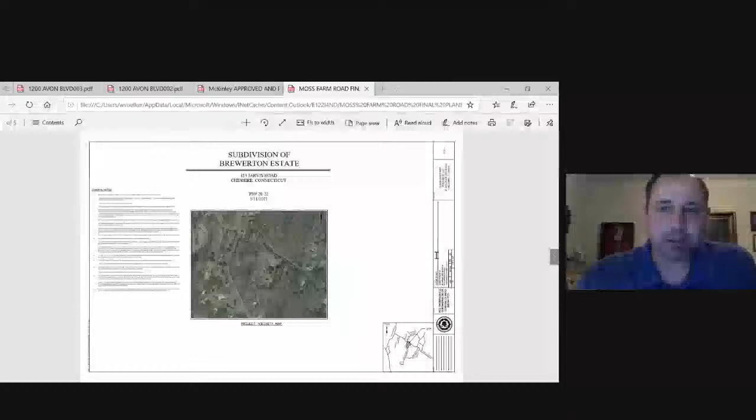If you could scroll to the next sheet from this — this one, yes, the top, too far right — yeah, right here. Okay, so you can see, it's probably hard on the screen, but in the very center of the site where you have the contour lines going up to the top of the hill, that big hill and ridge line is the most complicated part of the site.

So in order to develop this property, you have to address the large hill in the middle there. We looked at several different configurations of lots.

Before I go into that, over there on the north, the left side of the page, there's an outlot. That is actually a septic system in favor of what used to be the Curtis home, which is approximately 1,000 feet along Jarvis to the southeast.

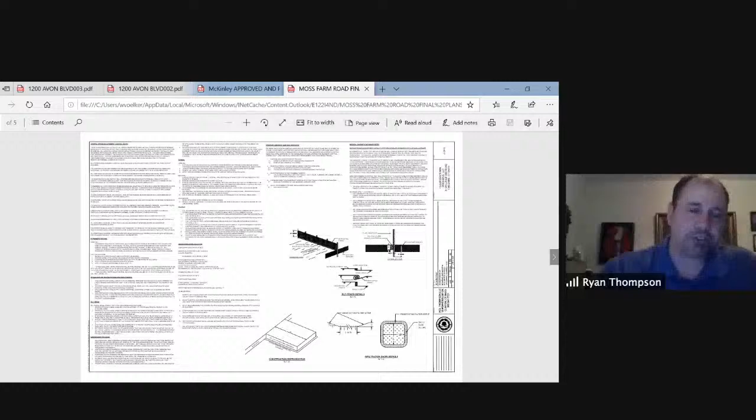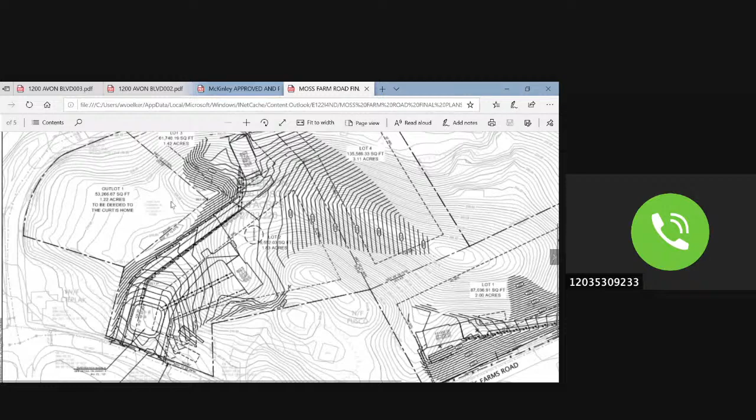Can you scroll out there? Can't do much with it, my computer won't let me do a lot with it, but the outlot is here, 1.22 acres. If you want, I can share my screen — I think I can zoom in a little easier if that's possible. Let's do it this way, Ryan. Okay, that's fine. The Commission has this by the way, they also have copies of this for themselves.

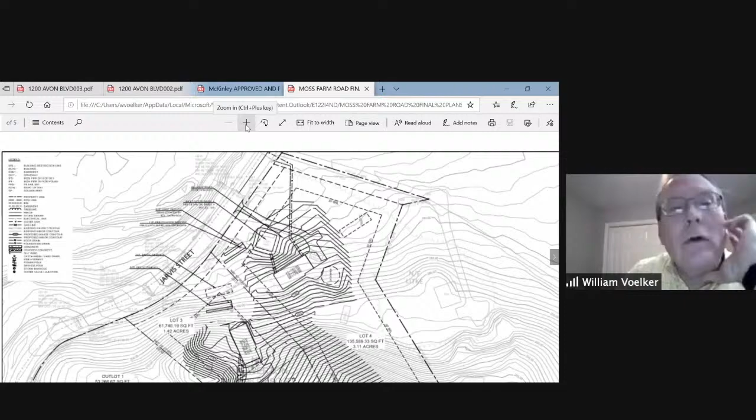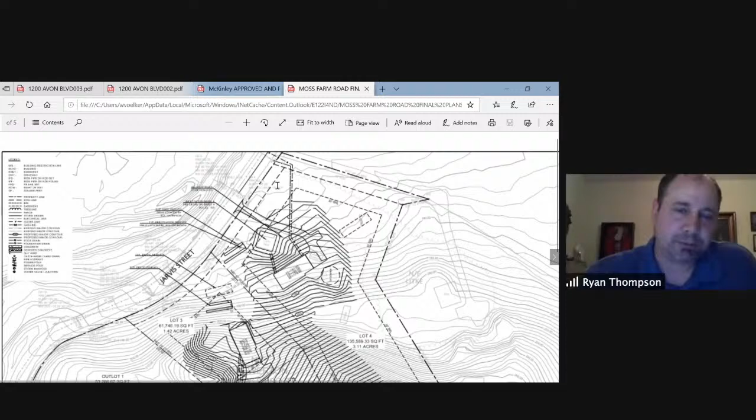Okay, well, you can see here where just a second ago, you can see the outlot. That's an easement that's been granted to the former Curtis Home School, basically up the road there on Jarvis Street. And they have a line, and you can see the easement along Jarvis Street by lots 3 and 4, right here, though that also is for their septic system line that goes to their field on outlot 1. So the intent is that's going to be deeded over to them.

It becomes their property, and it's not saddled onto a future homeowner, which I don't even think is legal. So yeah, there you can see it.

But back to the topography. Again, the big issue with this site is the fact that you have this major hill in the middle of the property that has to be dealt with. So we looked at several different configurations: a 5-lot subdivision, a potential 6-lot subdivision, and then ultimately a 4-lot subdivision like we have now.

Primarily, we settled on this 4-lot subdivision because it is the least invasive in terms of excavation. And already you have a fairly significant amount of excavation. I'm not going to sugarcoat it — it's approximately 40,000 cubic yards of export that's going to have to go on. And I'll talk about the plan to make sure that's done safely in just a second. But this is the one that has the least impact.

And you can see the very big cut up the ridge line to the middle of the hill. That's at a 4-to-1 slope — 4-foot horizontal to 1-foot rise at vertical elevation. So I tried to make it as gradual as I possibly could so that it would be easier on erosion control measures, and we wouldn't have to do a bunch of stepped benches and everything.

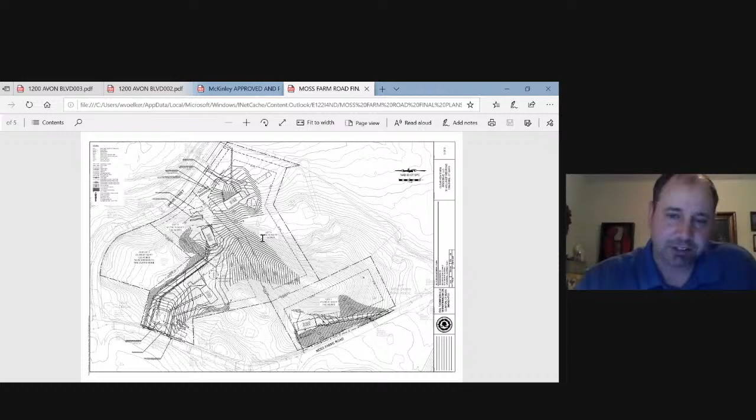So we're filling that a little bit to create a shelf to put the house, trying to balance out the elevation of the house, keeping driveway grades within reason. I do know there's some comments about the driveway grades, but the intent is that they're all 10%. So I will address that — that's the intent of the driveway grades, and to get the elevations where they need to be.

And that's why you have this long driveway on lot 1 coming out to Moss Farms Road, so that you can get a gradual enough rise up to the house pad. And then you have the same kind of thing with lots 2 and 3 — these long gradual driveways is the idea.

So I want to talk about the export and making sure that we have a safe situation with the trucks coming in and out of the property. The idea is that they would be limited to only 2 locations.

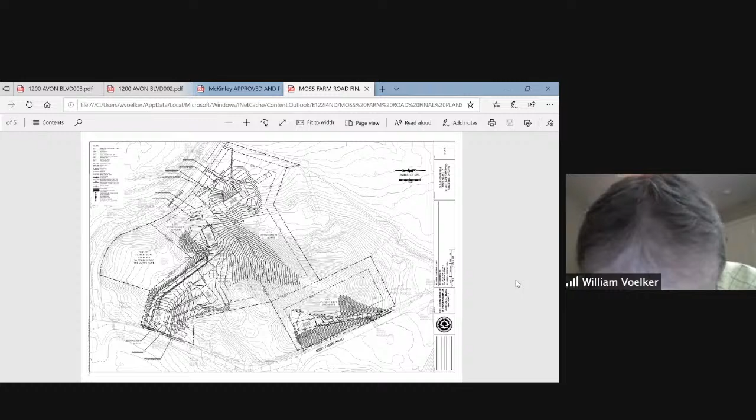And those locations would be, obviously you have to treat lot 1 as its own, so all the earthwork in and out of there - most of this is balanced as much as possible, so it should be a reduction of trucks coming in and out of there, but it's going to come to that one spot onto Moss Farms Road.

And then the rest of the site is going to be addressed in the wider area on Moss Farms Road where the driveways are going into 2 and 3, trying to avoid any access onto Jarvis Street itself, because you have steep grades in both directions and a very difficult turn there.

So all of the access in and out of the site would be from the Moss Farms Road side, one of those 2 locations. And one of the reasons why you end up having the cuts that you do is so you can almost build a little access road over to the lot 3 building pad and the lot 4 area that you're moving earthwork around on.

So that's the idea of how it all unfolded in terms of the design and the sequence of construction. I do realize there's a comment about that, which I'm going to add a sheet or 2 to clear up, making sure it's understood that's how the earthwork is going to be moving in and out of those locations, so that it's safe and manageable.

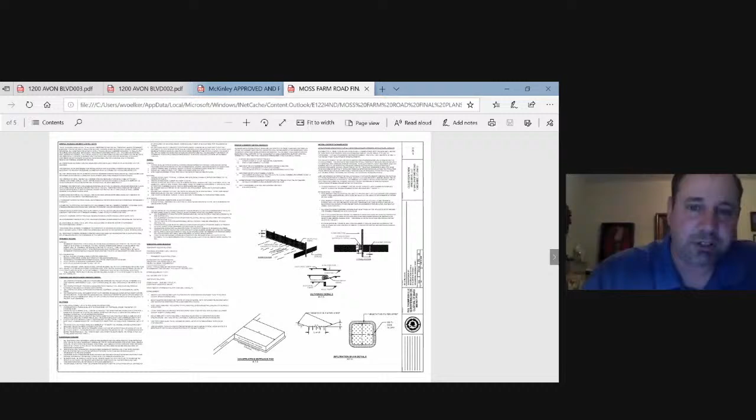And then if you go down to the last page - the fifth sheet, the one with the profiles. Let it load. That's what I have right there. Yeah, there we go, okay.

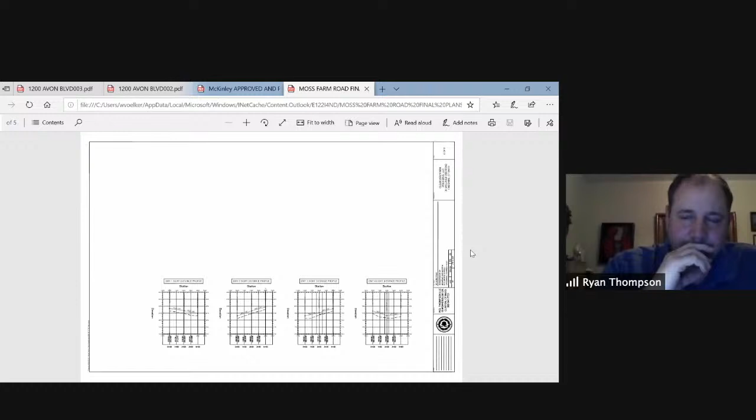So these 4 driveway site distance profiles, I specifically put them on here to show - it looks like some information is missing. That's all I have. I'll have to see why this is all you have. You better talk to the guy that sent them to me, Ryan, okay.

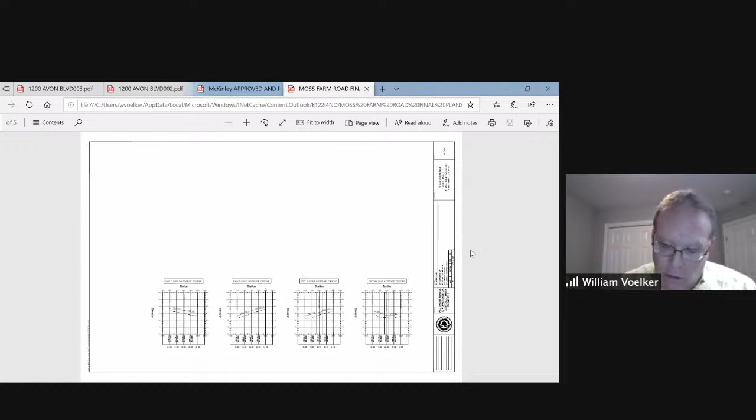I guess what got submitted physically, the information is on there, but regardless, I don't need it for what we're talking about tonight. I can just tell you about these driveway profiles - let me pull it up on my screen so I can zoom in while I'm talking.

What you have is I've done the calculation based on the grades and the stopping sight distance, and it came out to a calculated stopping sight distance requirement of 152 feet. I upped that to 200 feet in each direction for a factor of safety, so you basically have a field of view in both directions spanning 400 feet.

What these profiles are showing is that if you're sitting at the driveway where the front of your vehicle is not overhanging into the street, so you're in a safe location, you can look left and right and see a vehicle coming at 25 miles per hour, the posted speed on those roads, and you can see them 200 feet away, giving the driver adequate time to stop.

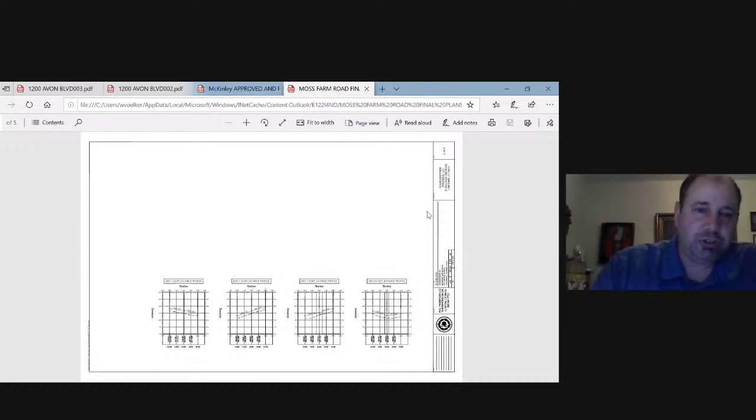However, this entire property essentially drains into 2 different areas. The southeastern part of the hill generally drains to the east of the property, into a creek on the eastern side of Jarvis, and continues on. The northern part of the property generally drains to the western side, and ultimately drains into a confluence with the drainage from the southern part. So they all end up in the same place, but through 2 different pathways—technically 3, but I've broken it down into 2 main outfalls.

So what I did was create 2 infiltration basins to treat and capture the runoff from the 2 main pathways we're addressing. One is sized to accommodate runoff from lot 1, even though runoff from lot 1 won't go through there. So you have a net reduction of runoff from the part of the property going into the infiltration basin on lot 4, to accommodate the runoff we can't capture on lot 1.

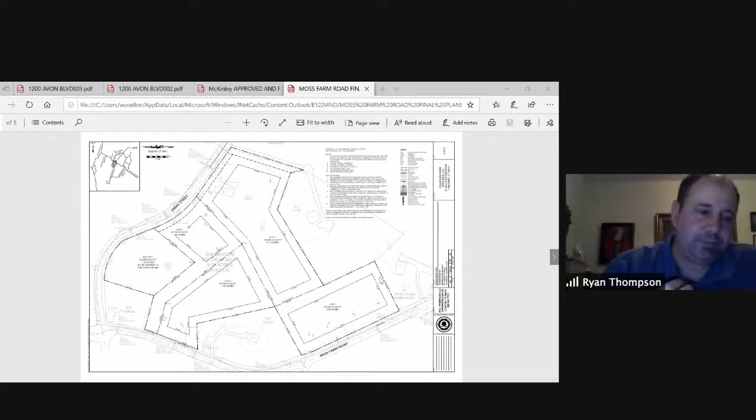Yeah, so the septic system on that portion of this existing property, before subdivision, is already built and has been there for a number of years. I don't remember exactly when it was constructed, but some years back. They had obtained an easement through this property to put a pipe, and then basically create the easement right there. And then the larger, almost square-shaped outlot is where their septic field is.

So the idea is we're just going to cut off that portion of the property that was already granted through an easement, and deed it over to the property owner that it benefits, and it becomes their property. It's not the property of the future homeowners of this subdivision, because they have nothing going to it. None of these 4 lots being created are tying into that septic system in any way, and they shouldn't have to maintain that property and those easements—and I'm not even sure the health department would allow it. So that outlot would be cut off and deeded over and become the property of, I don't think it's called the Curtis Home anymore, but it's the Curtis Home property.

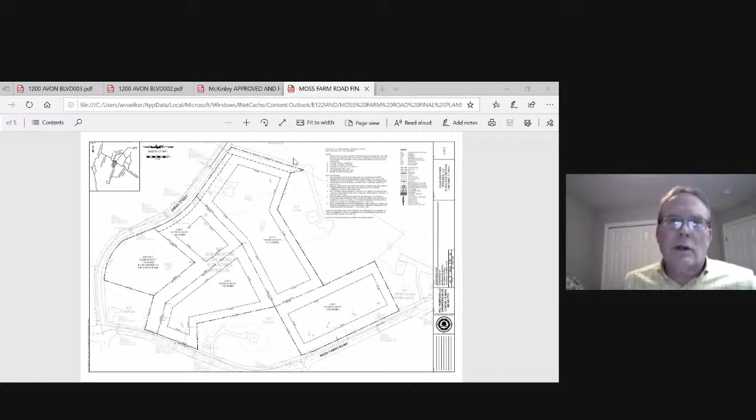Yeah, and as Ryan points out, Jeff, you couldn't even do this today—this is historic. I don't know when it was originally constructed, but Public Health Code wouldn't allow this today, ever. So, gotcha. So the Curtis home, where would that be? That would be the next property up from—no, lot 4?

Yes, they're on the next ridge line up, correct. And again, it would just be an easement going across these new lots, lots 3 and 4. Jeff, there's an easement in the front there for the location and maintenance, not by the owners of lots 3 and 4, but by the owners of the septic system currently on that property.

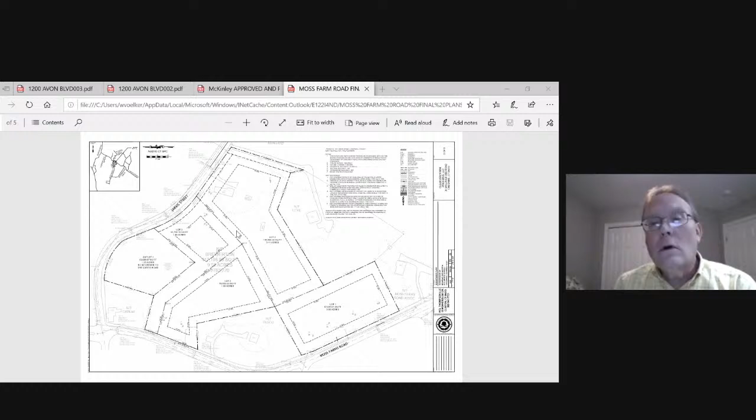Very unusual, just haven't seen that before. That's a rare one, sir. Anything like this - that's a new one for me, so thanks.

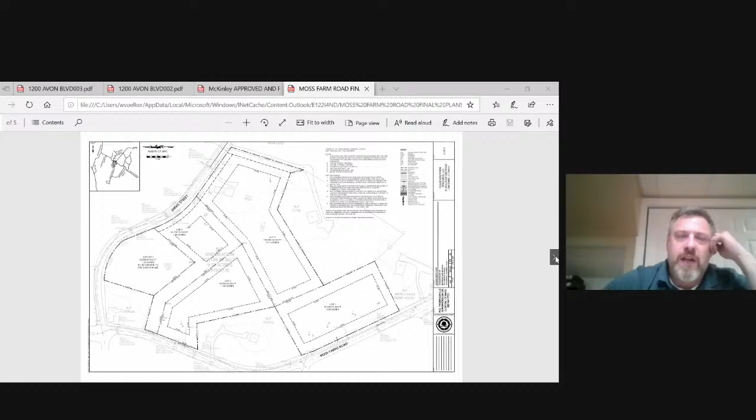Okay, I believe I saw Mr. Selmont with a hand up. Yeah, I just had a question. I see all the excavation going on, and you started to hit on the water flow. Is there any concern of the water running into the neighbor properties or neighbor lots? Any issues there that might arise?

No, so all of the drainage that's currently - let me back up. I've followed, as much as feasible, the existing natural drainage divides. So any runoff that's already coming off of the property that's not part of this development, yes, that will continue to cross neighboring properties on the fringes or outskirts of the property.

Anything that's being touched here is either being captured by the infiltration basins or is running off, in one case, into the culvert on Jarvis Street as an overflow, or the culvert on Moss Farm Road as an overflow. So it's not going into the neighboring properties - it's being captured in the infiltration basins or the existing storm sewer system that's out there.

Right, okay. I see lots 2 and 4 with the basins, and you know, I also see that there's a couple of houses on the corners of the street, but it's, you know, one thing.

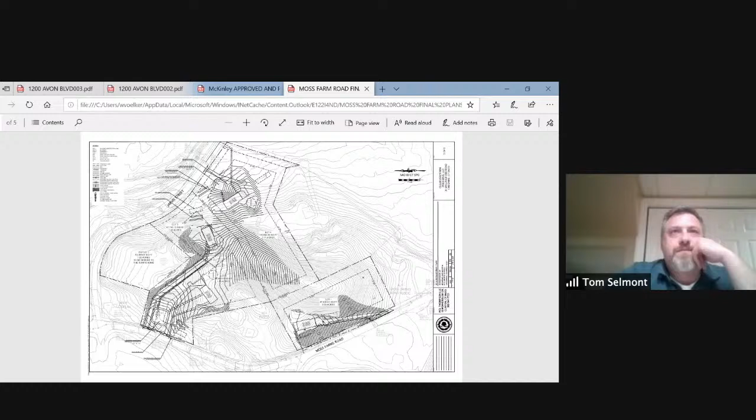Yes, so right there along lot 3, the cut on the side of the driveway - it's a cut, so anything coming from that's going to go towards the property, not towards the neighbor. Right, okay, yep, thank you. No problem.

Bill, you said there was supposed to be new maps. Yeah, we're gonna keep this hearing open, because he's got extensive comments to respond to yet, hasn't done that. So we're recommending you continue this hearing until the next meeting.

I understand it's definitely gonna be continued, but is there big changes in the maps or is it just minor things? No, there are some - he addressed some of it tonight. I don't think we're gonna see significant changes as far as layout goes. What we'll see is improvements in some of the things that he's proposing here, but generally what you see in terms of layout is what you should expect to see in 2 weeks.

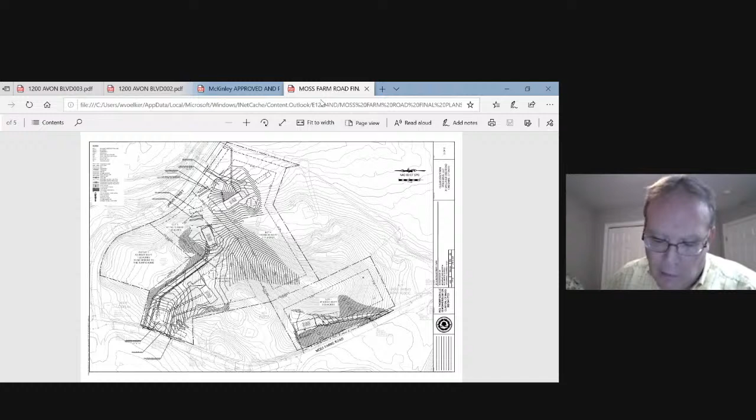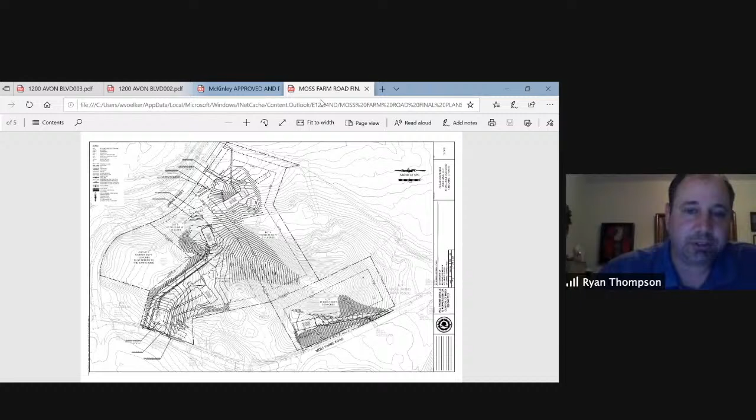Okay, yeah, I mean, to be honest, I think the biggest change I predict is going to be associated grading with widening these driveways to 15 feet per the fire department comments. And really that's only going to affect, most likely lot 1, because that grading is pretty tight up to the driveways there as it is. But it's not going to be a significant change to this.

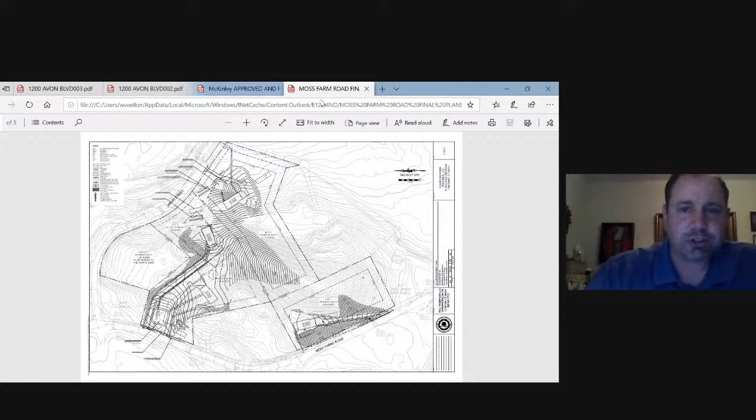I think what you're going to see is I'm going to add in a few more notes, change the calculations for the stormwater management based on comments there, and address some erosion control concerns that came up - that's largely the concerns from the engineering review.

Okay, thank you. Bill, do we have any public comment on this? No, Mr. Chairman, nothing. Commission members, run through one last time before this is gonna be held open, so.

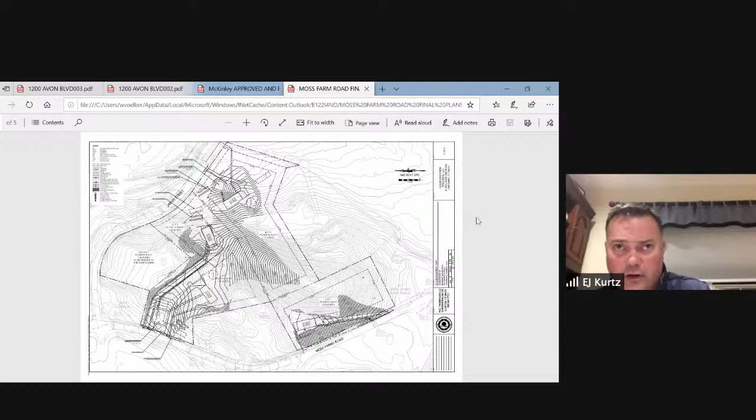Question - yes, Mr. Tedesco. Mr. Thompson, can you tell us approximately how many truckloads of fill will be taken off the property and over what period of time?

Well, I guess it really depends on the size of the trucks, but I can tell you it's about 40,000 cubic yards. Over the span of - I don't want to speak on behalf of the developer in terms of their timeline, so I don't know exactly when they're going to build which lot and which pieces are going to be done first. It'd be hard for me to answer in this meeting, to be completely honest with you, how long this would take, how many, over what period of time. But you're talking about 40,000 cubic yards, and the average truck, I think, is about 20 or 22 cubic yards.